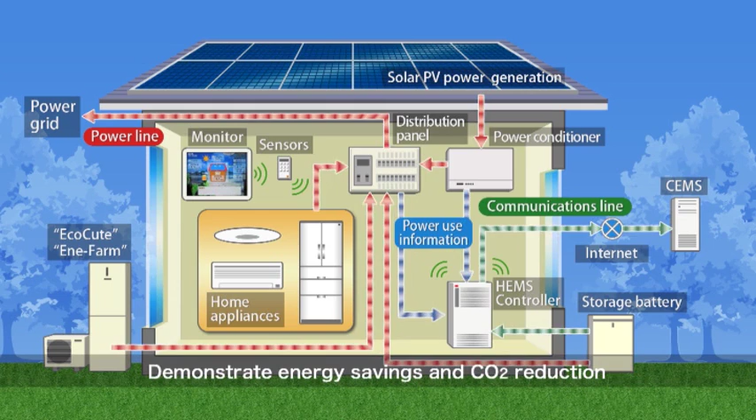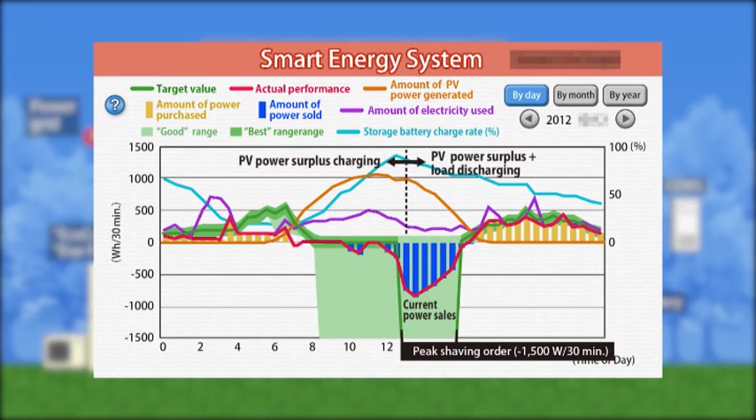In the residential sector, HEMS is being used in 14 houses. These systems manage electricity, gas, and other energy sources, demonstrating energy savings, lower CO2 emissions, and other benefits. In summer 2012, the project confirmed sales of solar-generated power can be increased by regulating storage batteries during peak shaving times.

Some 700 households also use smart meters and tablet terminals. Large power demand response mechanisms can intelligently control power demand using communications technology and new electricity billing plans. During a demonstration in summer 2012, power demand was controlled by simulating increases in electricity rates during peak hours.

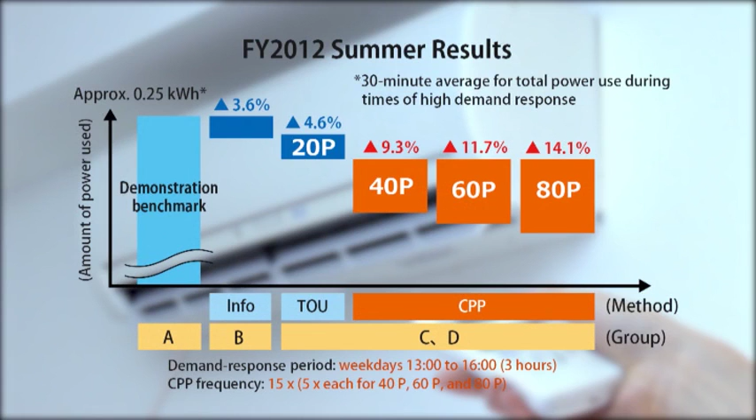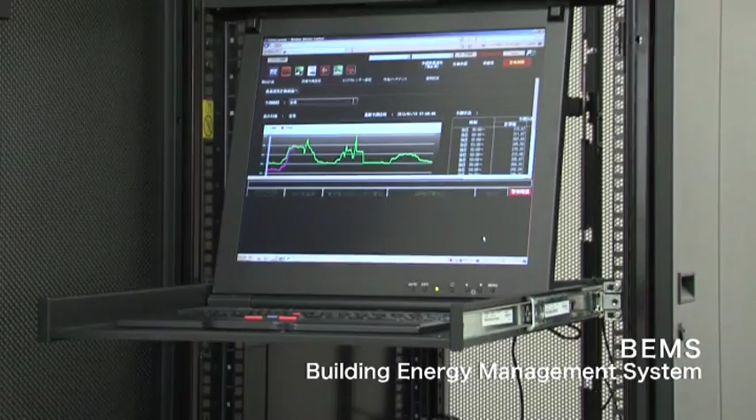In the commercial sector, a BEMS in Keihanna Plaza optimizes the use of electricity and heat while demonstrating energy savings and lower CO2 emissions and other benefits. In the transport sector, 100 electric vehicles are now in use. Peak shaving and peak shift approaches are achieved by recharging at times and locations as requested by the Electric Vehicles Management Center.

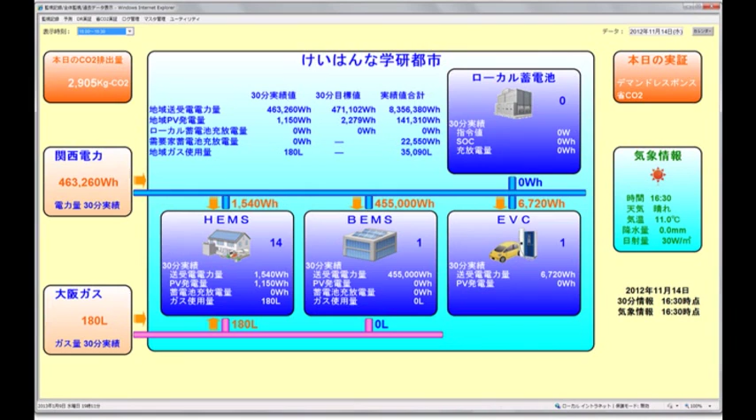V2X technology mechanisms have been applied to electric vehicle and reuse storage batteries. Effectiveness is being demonstrated to optimize plant facility power demand. Finally, in the community energy management sector, the project is demonstrating community-wide optimization of power supply and demand using a CEMS as a total energy management solution for issues like demand response-based orders for households, buildings, and electric vehicles.

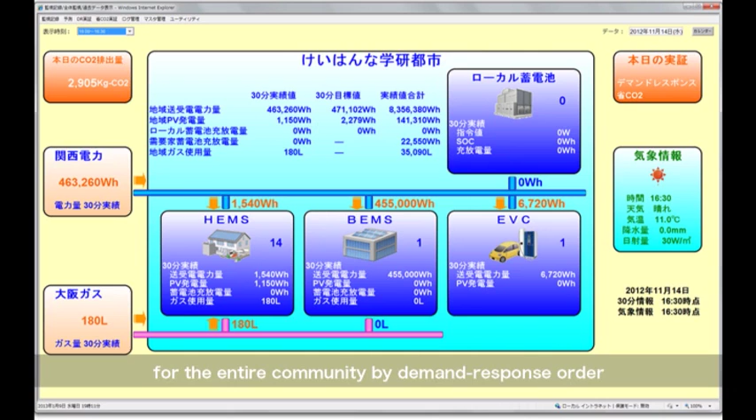In November 2012, a comprehensive community-wide demonstration began linking CEMS, HEMS, BEMS, and the Electric Vehicles Management Center.

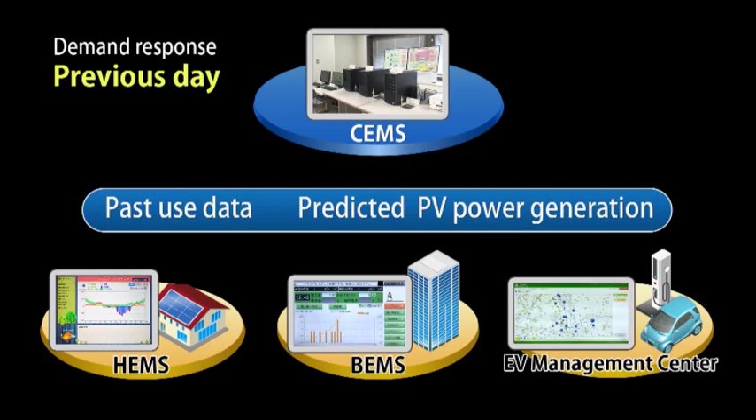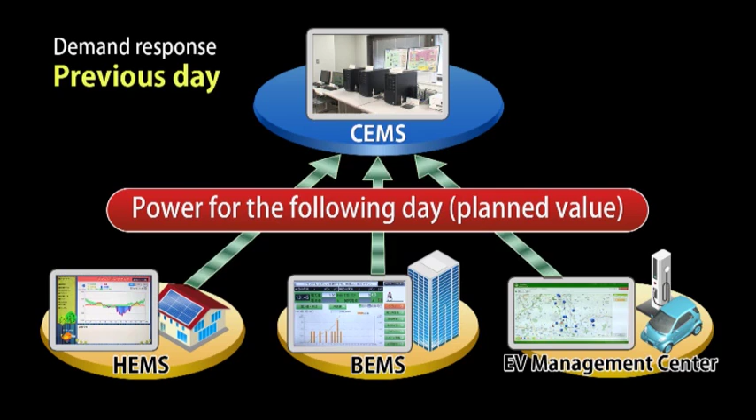The CEMS and customer EMSs, in other words, HEMS, BEMS, and the Electric Vehicles Management Center, engage in the following exchange. The customer EMSs make demand forecasts based on past energy use data for each household, building, and electric vehicle, as well as power generation forecasts for solar panels based on weather data. They then send planned power transmission reception values for the following day to the CEMS.

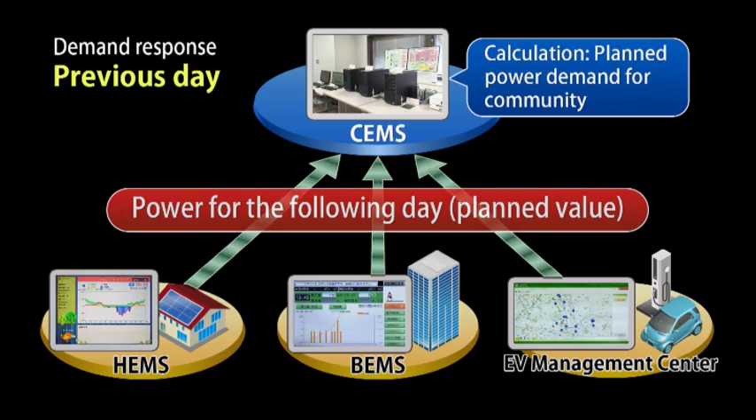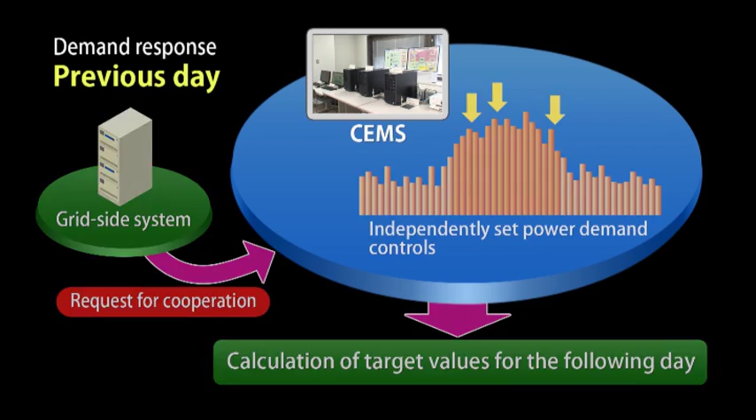The CEMS gathers data sent by customer EMSs and calculates a planned power transmission reception value for the community. The CEMS uses this value to set targets for power transmission and reception, taking into account power demand controls and requests for cooperation from power grid operators. The CEMS allocates target power transmission reception values within an adjustable range to customer EMSs and notifies them. The HEMS, BEMS, and Electric Vehicles Management Center use terminals to communicate these values.

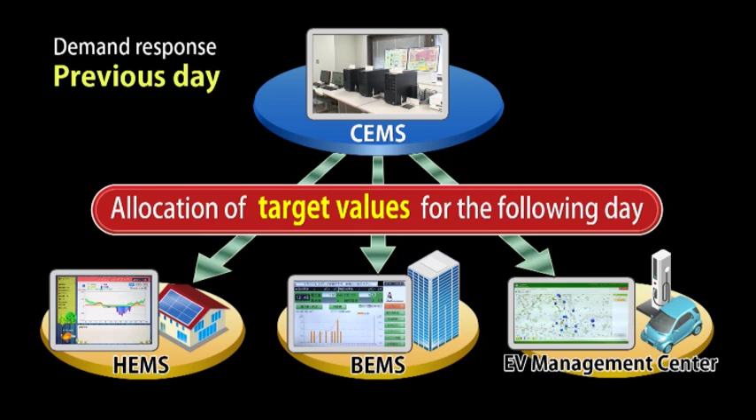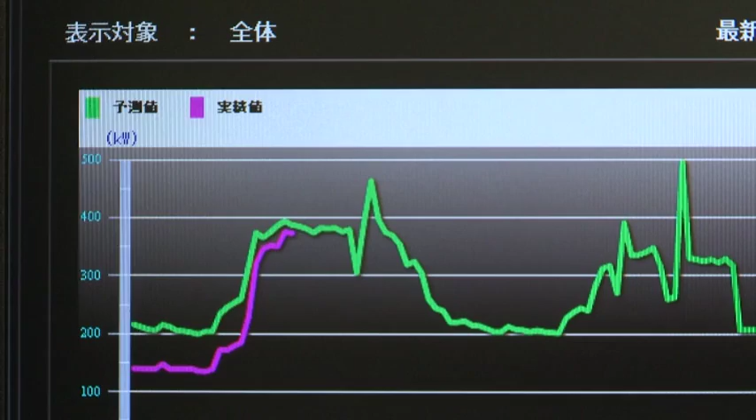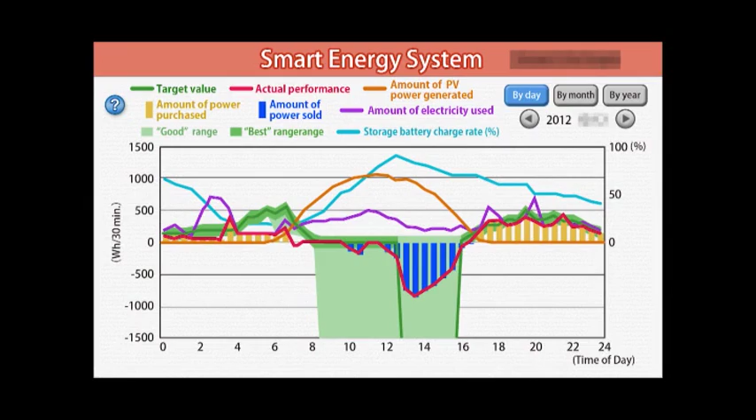Customers use power in accordance with the target value displayed on their terminals as part of demand response. The CEMS monitors actual transmission reception in the customer EMSs. When the target value diverges too much, the CEMS issues a same-day order to the customer EMSs to close the gap. When demand response is complete, the CEMS issues points based on how close a customer's power use came to meeting the target value. You can see how the project is optimizing energy supply and demand balance in the community.

The Keihanna Eco-City Smart Community Project is working with the community to demonstrate electric vehicle recharging systems using 100 electric vehicles. Anticipating the day when electric vehicles will be commonplace, the project wants to learn about power demand during recharging and demonstrate the effects of demand response in terms of the peak shaving and peak shift approaches.

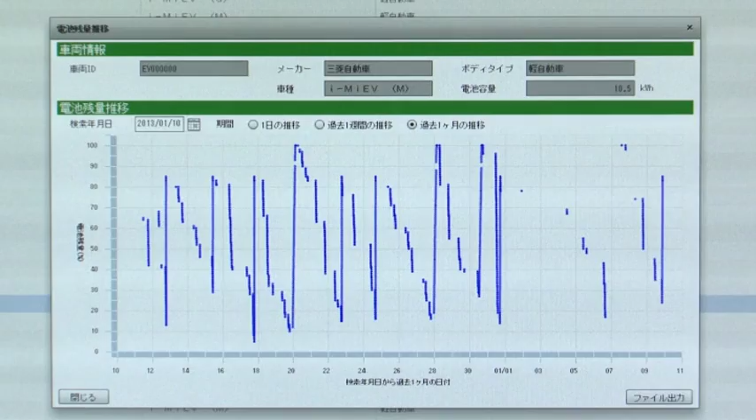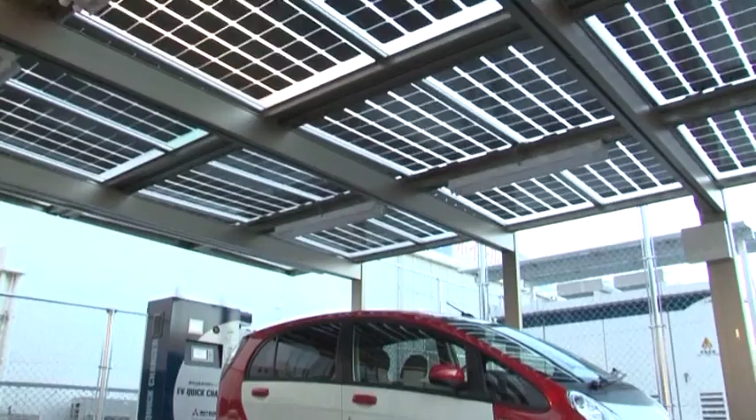The Electric Vehicles Management Center keeps tabs on the remaining charge, location, and past use of each of the 100 electric vehicles to predict their recharging power demand. The center then uses these predictions to recommend recharging schedules to drivers through the vehicle's navigation systems or email, or to ask them to recharge at designated locations. The results inform the center's understanding of recharging peak shaving and peak shift effects.